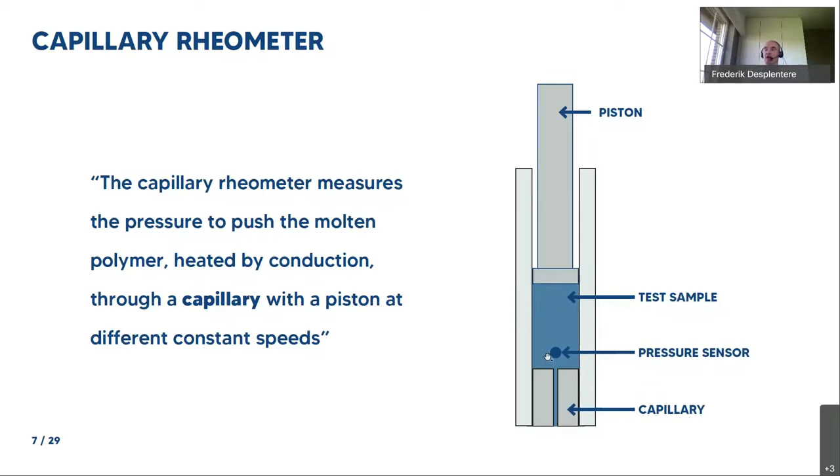So how do you work with this equipment? Typically, the user fills up the whole barrel, which has a diameter of about 15 millimeters. This is all cold material going in, and you fill it almost to the top. In that way, you'll be able to measure a whole range of shear rates, ranging typically from about 20 reciprocal seconds up to 50,000 reciprocal seconds, depending on the material you want to characterize.

In that way, you can measure the pressure as a function of the applied shear rate, which is the last step. But before that, some compaction takes place, to be sure that we do not have any air in the material loaded into the equipment.

Typically a preheating time of 5 to 10 minutes is used to be sure the temperature of the sample is as homogeneous as possible. If we want to heat 15 millimeters of diameter of material, this needs, depending on the thermal conductivity of the material and the specific heat, at least 5 minutes to have it almost the same temperature through the thickness. This can be calculated using standard heat transfer formulas, but it's important to know you have to wait several minutes before you have an accurate enough, homogeneous temperature.

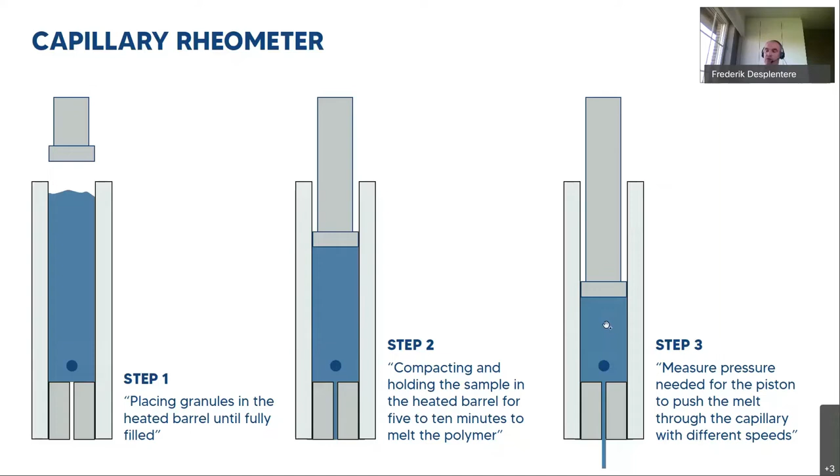So once this is completely filled, you can go for the measuring through the different steps and register the typical pressure profiles as a function of time. Measuring time can also take up to 15 minutes if you want to measure lower shear rates.

On the other hand, in our lab we have specially designed equipment available, a kind of variation on the standard capillary rheometer. I call it a shear heated capillary rheometer. Instead of just filling the sample immediately into the measuring room, we put the material below a certain plunger, and as soon as the material is loaded, we also need to evacuate the air which is possibly entrapped in the material. A plunger comes down with a certain speed, and it forces the material which was already there from the previous measurement through a gap that can also be controlled.

While this preheating is going on, the plunger comes down with a controlled speed, and this piston is turning around also with a certain speed. In that way, we have a kind of shear heating in this region, a combination of shear heating and conduction, to heat up the material which is in the waiting room and bring it into the measuring chamber.

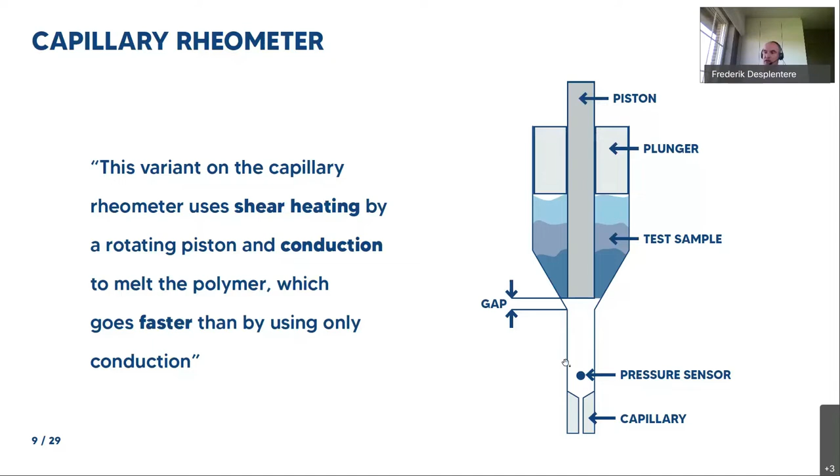Once the material is in this measuring room, measurements can go ahead, which is indicated in these different steps. First, we put the material on top of the previously inserted material. Once the material is there, the plunger comes down, and the piston is rotating, and this is done until a certain requested preloading pressure is present.

As soon as this pressure is reached, the feeding stops, the rotation stops, and then the standard capillary rheometer measurements start, and different shear rates are realized, and pressure is registered. So the rheological behavior can be measured this way.

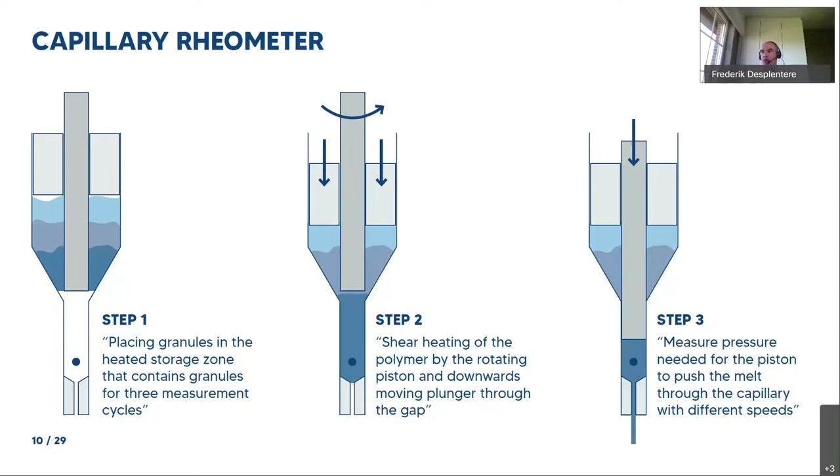Before we go to the overview of the obtained results, just a comparison for both of them. If you look at typical measuring times for any kind of material with the standard rheological capillary rheometer, you have to take into account a typical measuring time of about 20 minutes, while with this advanced one you can do it in less than 6 minutes, which is really fast.

You also have to keep in mind that concerning material storage, or history of the material, each time you have to load a new sample, there's no possibility to already prepare your material in an intermediate stage. Here, you have a kind of pre-treatment already, so air can evacuate at somewhat lower temperature, so it's a kind of gentle preparation, even in a short time.

So really focusing on the heating or thermal loading of the material, in the standard one, you need at least 5 to 10 minutes before you have any measuring results, while over here this preparation phase only takes 30 seconds.

Concerning temperatures, in a typical capillary rheometer, the temperature along the barrel is all the same value, while for this type of equipment, we typically keep the storage volume at lower temperature before going to the measuring room, where temperatures are the ones at which we want to perform the shear viscosity measurements.

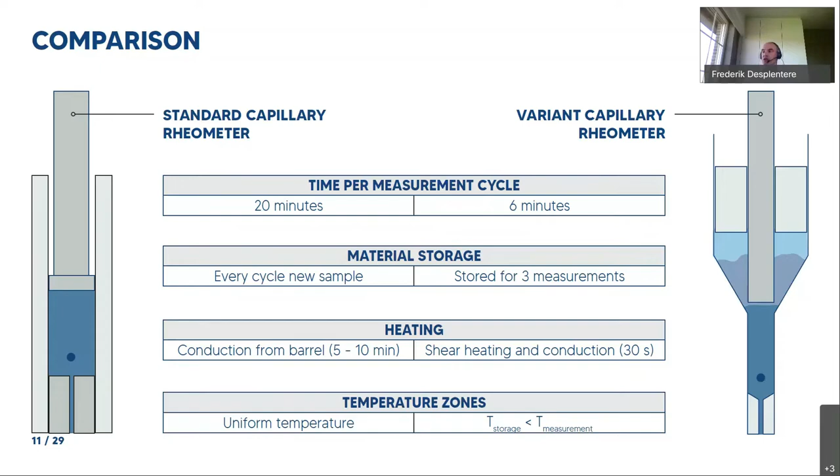Okay, so the next part in this presentation is about rheometry on bio-based polymers. But what are bio-based polymers? Bio-based polymers are plastics or polymers that are fully or partially retrieved from renewable raw materials, such as corn or sugarcane, starch, and cellulose. Some famous examples are PHA, PLA, PBS, or biopolyethylene or propylene.

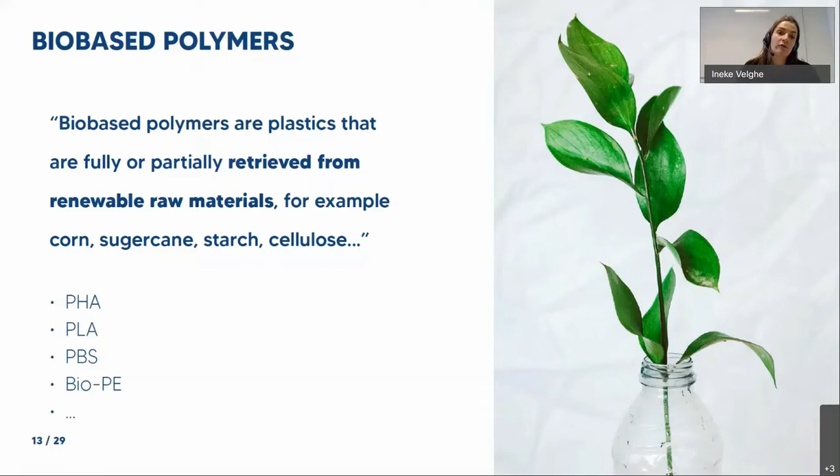These ester bonds tend to degrade when exposed to high temperatures. Also moisture or shear stresses can result in degradation of our molecular chains. Multiple types of degradation happen at the same time: thermal, mechanical, oxidative, or hydrolysis. All these types result in the same effect - our molecular weight decreases, meaning our long polymer chains, which we want for good mechanical properties, break down into smaller fragments, and we see a decrease in molecular weight.

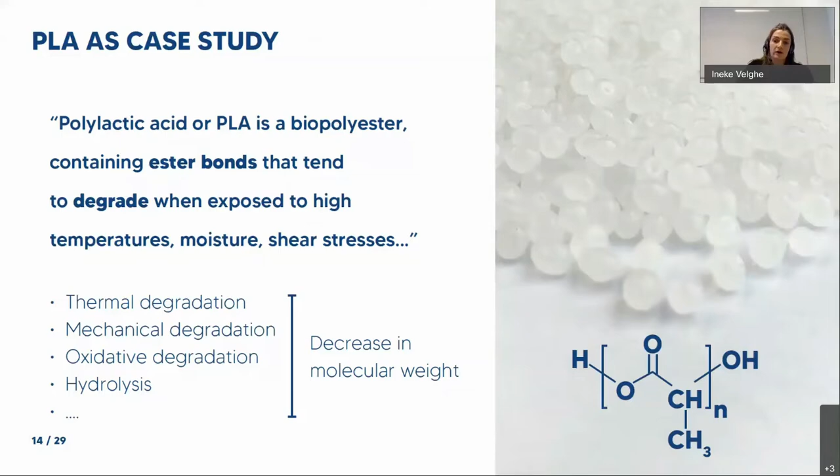To show you the importance of degradation during measuring or processing these types of materials, we did some experiments, and we are glad to share our results with you today. So the first one we tested is the influence of temperature.

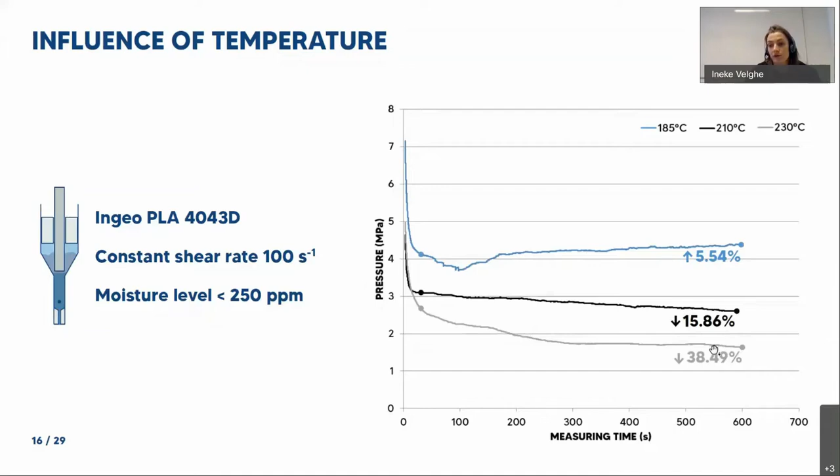We did the same experiments with this variant of the capillary rheometer, and we see the same results - the largest decrease in pressure at the highest temperature. How can we explain this?

When we take our start material, it has a certain molecular weight, which represents the length of the polymer chains and is directly linked to our viscosity and pressure. A low molecular weight typically means low viscosity. When we measure or process these materials at high temperature, we expose them to thermal degradation and chain scission - meaning our long polymer chains break down into smaller fragments, leading to a decrease in molecular weight and eventually a decrease in viscosity and pressure.

This is what we see on the graph: the higher in temperature we go, the more thermal degradation there will be, and the lower the pressure will be along the measurement time.

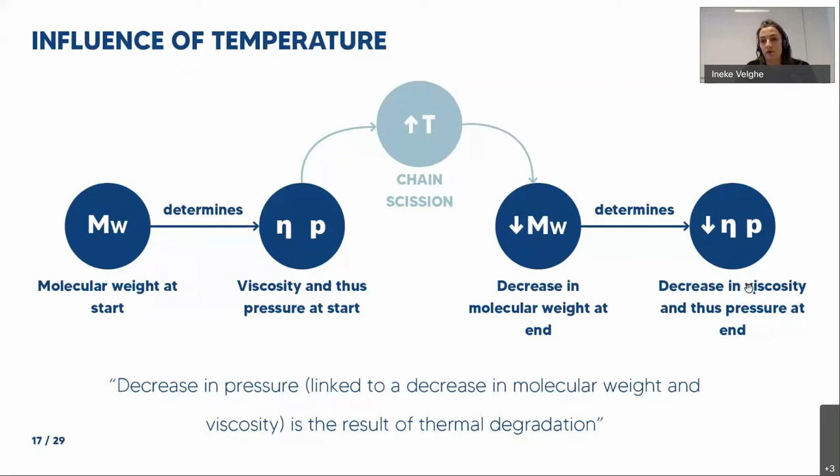A second thing we studied with these measurements is the influence of the preheating phase. As Frederik mentioned before, this variant of the capillary rheometer does the preheating phase differently. We typically have two zones: on top, the storage zone, which in our experiments has a temperature going from 145 to 185 degrees Celsius, and below, the actual measuring zone, with a temperature of 210 degrees - higher than the degradation temperature, since PLA typically starts degrading above 190 degrees Celsius.

So you can see that our storage zone is at a temperature below 190 degrees, and the measuring zone is above 190 degrees.

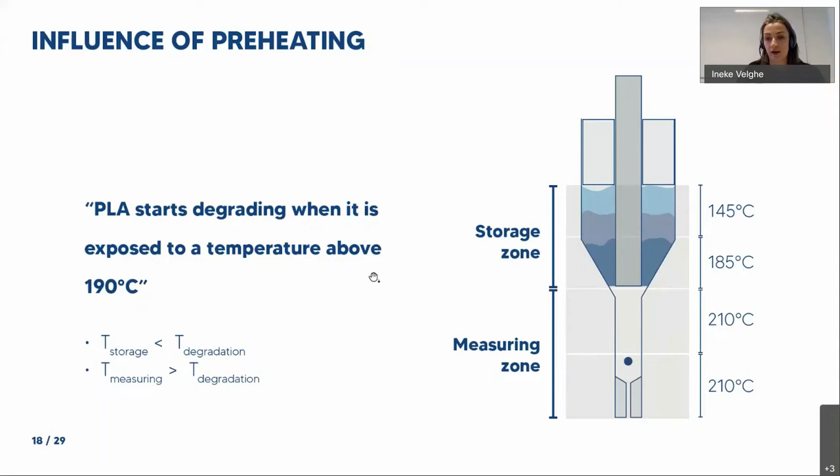So that's something important to keep in mind, because we did two experiments. The first one, there we put our material in the storage zone, and we extend the time that it's here

in this zone, and we minimize the time that it's in the measuring zone. And in the second experiment, we minimized the time that it's in the storage zone, and we extended the time that it's in the measuring zone.

What do I mean with extending? In the storage zone, extending the time means that when we put new material in the storage zone, normally we immediately press start for the next measurement. When we extended this time up till 600 seconds, we just waited, so it's at a high temperature for a certain time,

and then we only start the measurement. And extending the time here in the measuring zone means that we will perform a really low and long measurement at a low shear rate.

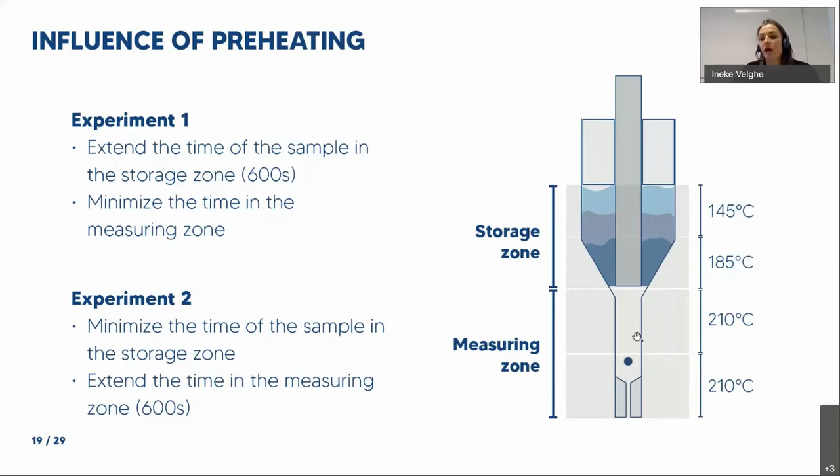So these are the results for the first experiments. On the x-axis, you can see the waiting time - the time between putting new material in the storage zone and starting our actual measurements. We performed multiple measurements, 180 seconds, 240, 300, up to 600 seconds, just waiting in the storage room.

And then we looked at the pressure, which is measured at a different shear rate. So here we performed a normal measurement, a different shear rate profile. And what we would expect when we expose this material for more than 10 minutes to these elevated temperatures, we would think that there would be a decrease in pressure.

But what you can see is it doesn't matter how long we leave it in the storage room, there is no clear trend in a decrease of the pressure that we measure, meaning that extending the time in the storage zone at 145 degrees until 185 degrees does not result in a decrease of viscosity and pressure.

And why is that? Because our temperature in the storage zone, which was maximum 185 degrees, is below our degradation temperature of PLA. And that's a good thing because we can keep our material in the storage zone for a long time without having degradation during this preheating phase. And that's really important for bio-based materials.

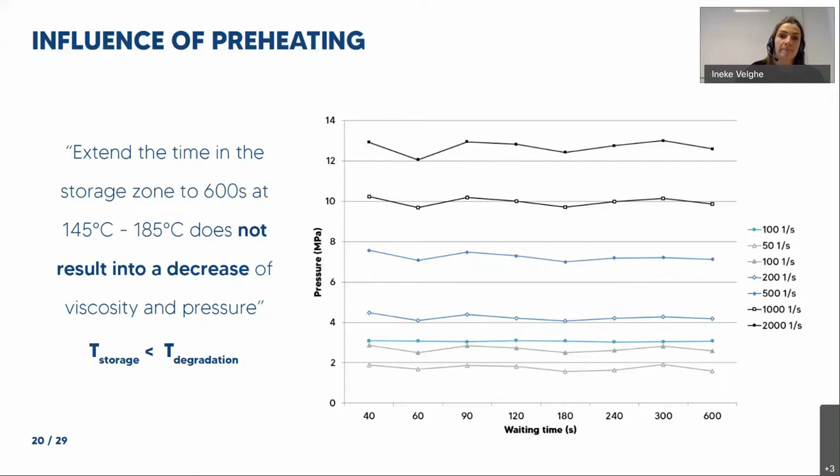The second part of the experiment was that we extended this time in the measuring zone, so we keep it there for a long time at 210 degrees, and we can see, as previously mentioned, a decrease in pressure along the time due to thermal degradation. And that is because our actual measuring temperature was 210 degrees, which is above the 190 degrees degradation temperature of PLA.

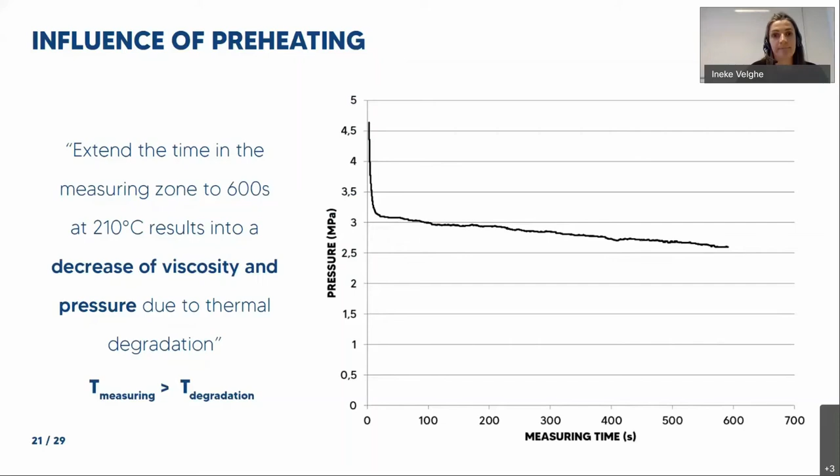So when we compare both of them in terms of the preheating phase, the standard capillary rheometer does have degradation occurring during our storing and preheating phase, because there is only one uniform temperature, which is often above the degradation temperature of our bio-based material. And we will have degradation during this phase where our sample is heated up to its melt phase.

Then for this variant on the capillary rheometer, we have to conclude that degradation can be limited during this waiting time, because the temperature in the storage room can be kept below our degradation temperature. And this is really beneficial for our biopolymers because they tend to be really sensitive to thermal degradation.

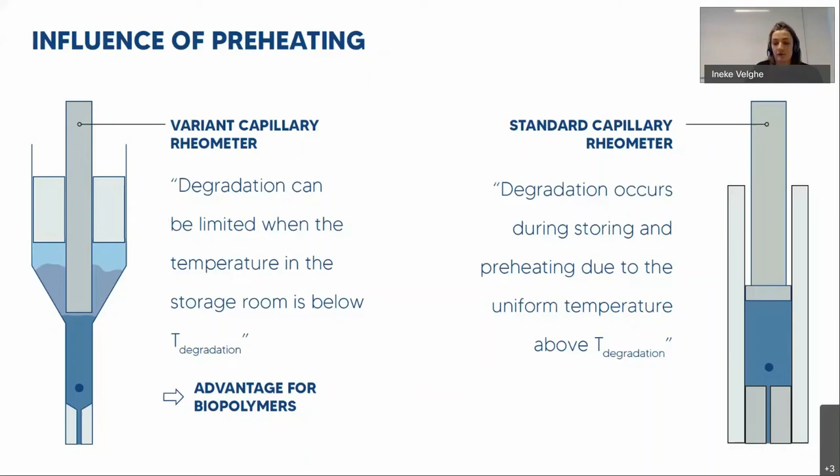The last effect I want to discuss with you is the effect of moisture. What's important is we always have to dry PLA before measuring it, because PLA and other bio-based materials tend to absorb water from moisture out of the air, resulting in an extra type of degradation during measuring.

So what did we do? We took two temperatures, 210 degrees and 230 degrees, and we measured one time with dry material, which was dried to the recommended 250 parts per million. We also did the same measurement, but with not dried material, which was 1,250 parts per million. And we repeated it with a higher temperature.

So we can conclude here that on top of the thermal degradation, the hydrolysis or degradation due to water also has a really great effect on our measurement results. And it's important to be aware that our measurement results can be influenced by all these types of degradation.

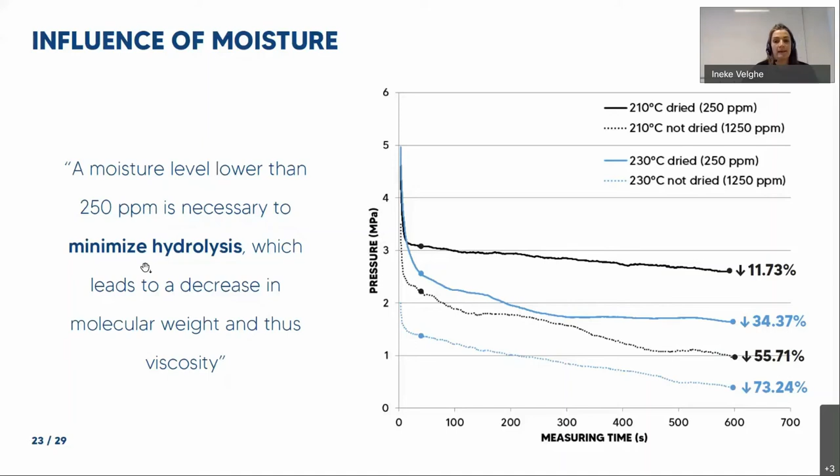So it's really important to keep a moisture level lower than 250 parts per million, and that's necessary to minimize our hydrolysis, because it would also lead to a molecular weight decrease and a drop in viscosity.

So just to end this part of the presentation: rheologically characterizing our material, especially thermal sensitive biopolymers, requires a critical mindset. You have to be aware of the different types of degradation that are occurring, and you need a structured method to minimize our degradation.

And how can we do this? We have to minimize our residence time, the time of our sample in the measuring machine. We have to minimize moisture level and also keep it as constant as possible when we want to reproduce our results. And we also want to minimize exposure to high temperatures due to thermal degradation, because it seems to have a really large effect on our measuring results.

So I would give back the word to Frederik. Thank you.

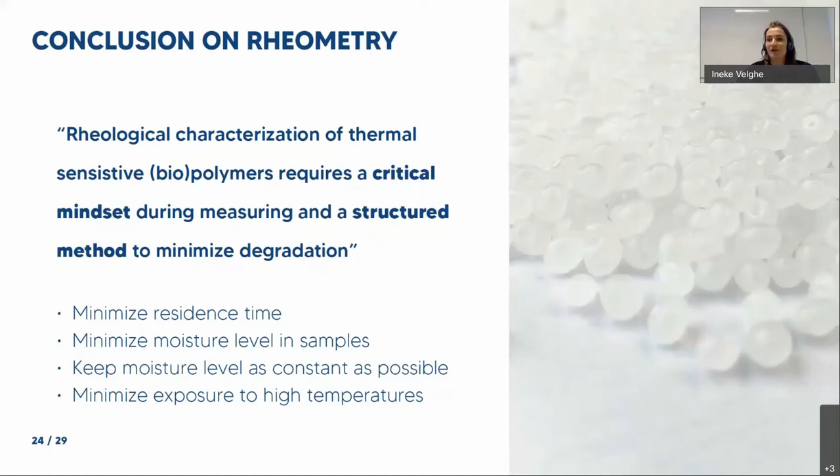Okay, the final part within this presentation is in fact the upscaling, and to see how this is applicable to be used in real industry, because the results shown by Ineke are just based on lab equipment. So the main challenge is, of course, how do we translate it into real processes.

If you think about industrial processing, the main focus in the PhD of Ineke is to look for extrusion processes. Typically one wants to combine fast heating, and that's the main reason to have advanced screw inside processing equipment.

So the aim is to investigate how much loading can be applied to the material, and which type of machine is necessary to get the material as fast as possible into as homogeneous as possible temperature, before it is transformed into its real shape. That's the main aim of the PhD.

So this upscaling is to find the link between the material characterization inside the lab and the real processing on large scale, maybe several hundreds of kilos per hour. So one has to pay attention to moisture content, the mechanical loading which is occurring, which thermal loading is on top of the material, and also which type of machine is necessary.

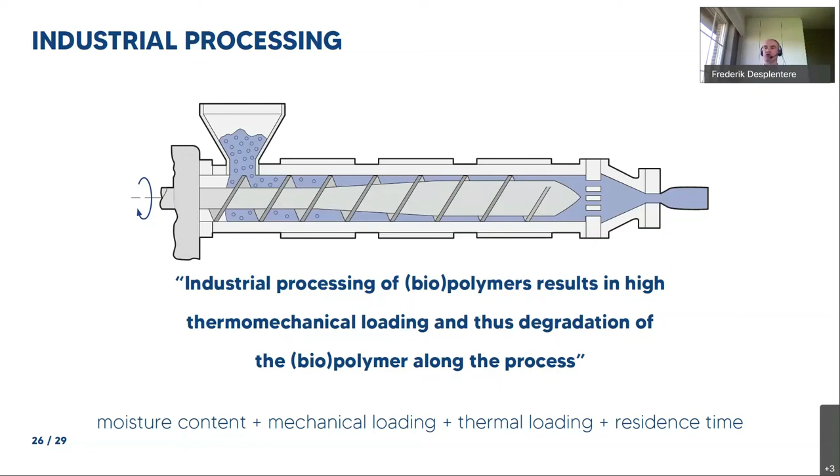So we can also use numerical simulation tools to look for the residence time into the equipment. Depending, for example, if you have an extruder with a maximum RPM of 50, you can look at residence times at high temperature. If you have a too large machine and run it at really low RPM, you see that you are far off the wanted residence times in the equipment.

In fact, you only want to have it maybe 1 or 2 minutes inside the equipment. This can be illustrated using the appropriate numerical simulation tools. This is just an example, so you of course have to use the appropriate machine for your application - don't buy too large equipment.

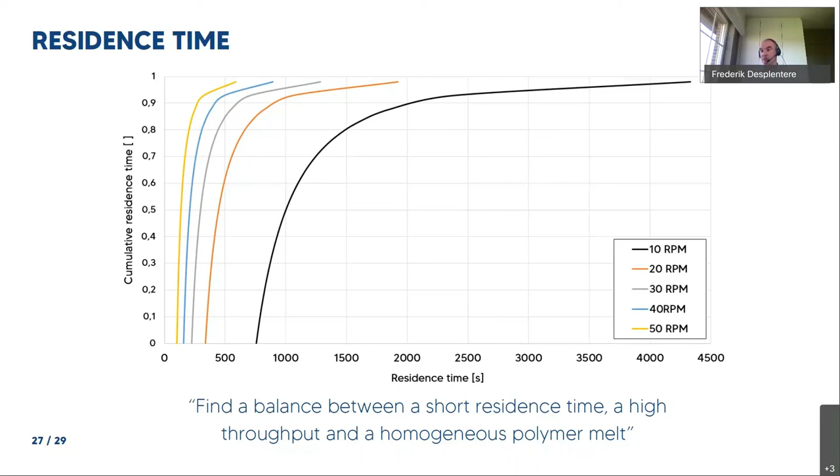So based on the results on lab scale and the numerical simulation tools, we are able to predict which residence times are there, and hence combining the results, we will see which drop in properties will be there. So in that way, the final goal is really to define the state of degradation when you have processed your material.

If you have a really long and large process, maybe half of your biodegradability has gone during the processing, which is of course not the aim. The aim of the PhD of Ineke is really to limit this degradation during processing, to define the optimal processing conditions, and of course also being aware of the moisture level, taking this into account.

So what's really happening on top of this is to go for a kind of next stage in the modeling of this type of materials. That's the main aim of this research, and already some initial results are shown.